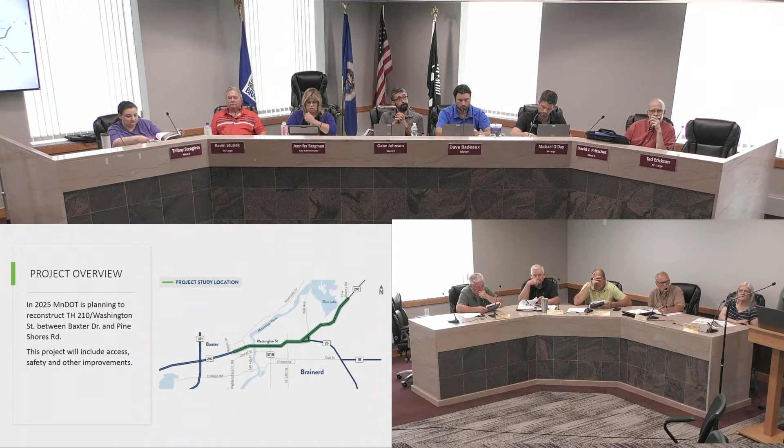So our study of this project is essentially to learn about this project from all aspects of it—businesses, truckers, commuters, pedestrians, bicyclists. We want to learn how people are using this, how people aren't using this, what are the problems, what are the issues, how can we solve that?

We have some solutions we'll be presenting later, Chris, with SEH, but that's just the first step of many to get there. This is what the study is to do—to get everybody at the table talking. As we go through the presentation, feel free to stop us, and if you have a question, just let us know. We want to hear from people.

So here's the schedule we're looking at for this project. 2020 was a big chunk of analyzing the information, collecting the data, and although it's not shown here, in the winter of 2020 we went out with online engagement. It's a MetroQuest tool that people can use online, taking a quick 15-minute survey, marking areas of interest and writing comments on everything. We did that in the winter of 2020.

This spring we've been analyzing that data along with the existing traffic data that SEH has been obtaining, putting it all together and trying to develop some solutions and possible things to move forward on this project. The next step is our second engagement process, which will hopefully have more in-person interaction, plus an online open house to gather that feedback too. After gaining that input, we'll go back to the drawing board, get more detailed into the layouts, and draw more specific plans to reach a preferred concept alternative that we'll bring to the City Council for municipal consent. That's the end goal of this study—to have a community-approved, municipal-consent layout that we can move forward with to design and build the project in 2025.

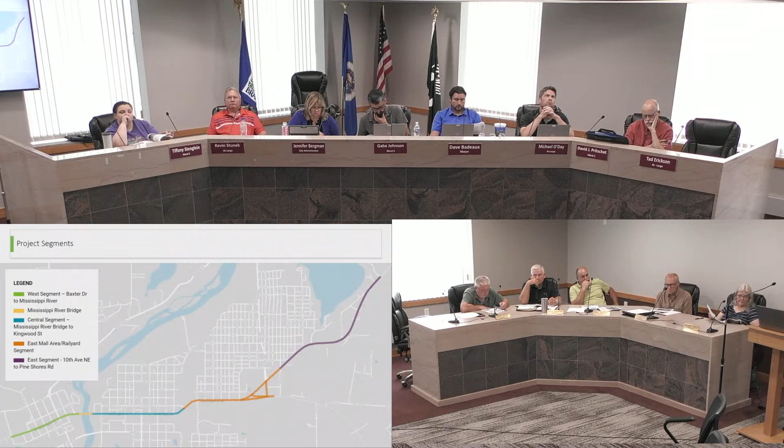Starting out with a little bit of context: it's a complicated corridor. To set up a framework for presenting the information, we divided the corridor into several study segments, built around land use changes and major features along the highway. So as we step through the information, we'll go west to east through the corridor, and this is the way we plan to present it to the public as well.

We're going to start in the west segment. As we go through each segment, you'll see a common flow of graphics—each will start with an image that looks similar. Here we're showing Baxter Drive to the river, our west segment. The existing image shows basically what's out there today in terms of number of traffic lanes, shoulder widths, sidewalks, those types of provisions. Under proposed, that's the idea of how it could be modified to help better address some of the issues we've encountered through public input and our analysis.

In the case of the west segment, it's a little different out here, similar to the far east segment as well—a relatively newer segment of roadway, with right-of-way a little wider and more flexibility. So what we're focusing on here is trying to widen the sidewalks a bit. Today we're on 5-foot sidewalks, and we'd like to get those maybe to 8-foot, which can be done within the existing right-of-way. We'll come back to more of these images later in the presentation.

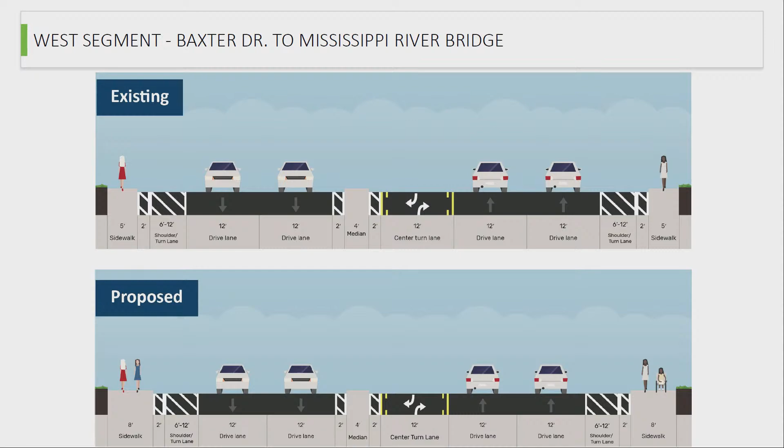Within the west segment, the focus problem area is at Northwest 4th. Some significant improvements have occurred here recently, but a couple more ideas to further enhance it. Number one would be the south approach as you're coming up to 210—to go left, we're suggesting adding a second left turn lane, mirroring what's going on across the road heading south on Northwest 4th. That could allow an overall better flow of traffic through the intersection and improve operations.

Secondly, where both the number twos are shown, we're proposing to extend the raised median through those intersections. That's primarily in response to the frequent occurrence of traffic waiting at the signal, backing up more than a block, and either blocking those intersections or making it difficult for traffic on 210 to take a left off to the side street.

I was mentioning to Luke, I got up here a little bit earlier today and had some time to drive the corridor. I was heading westbound just before 3rd, and that's what was happening—I left a break and a car took a left in front of me, and there was a car coming on the shoulder trying to avoid traffic to take a right turn. It wasn't that close of a call, but it illustrates some of the complexities of this area. With all the traffic, it's just difficult to store all the cars the way it's laid out today.

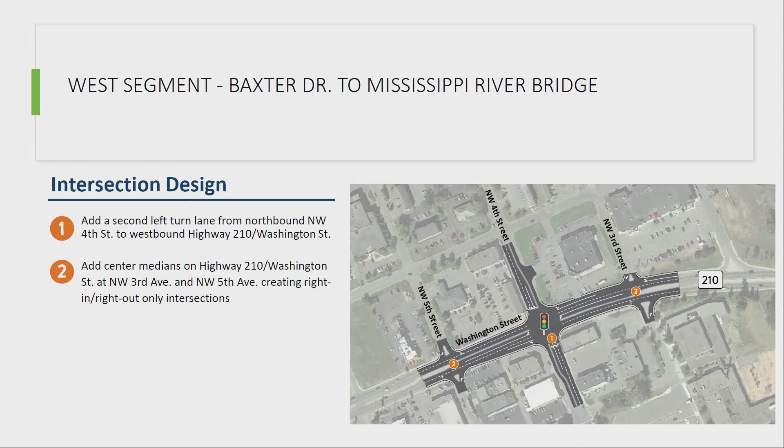Anybody else? Continue, thank you. Okay, now we're at the river bridge, and this is purely just the bridge itself.

Of note, MnDOT's currently studying the bridge in terms of what may need to be done to it over time to rehabilitate it. Our assumption for this study is it's currently a 76-foot wide deck, and that's what we're working with. Our assumption is we are not going to be able to widen the bridge further. So the challenge becomes: what can you do to introduce some improvements, knowing you're stuck with the width of the bridge you've got?

So again, another one of these images that shows existing conditions, and what stands out here is, as you're aware, there's a wide median on the bridge. So our suggestion is to widen the sidewalks by reducing the width of the median. Fairly straightforward. There's a kind of ripple effect of that change that I'll get to a few slides further at the Chippewa Street intersection.

But again, the concept here, and what came through loud and clear in the public input, is this is really a constrictive choke point for pedestrians and bicyclists. You got options east and west of the river, but to cross the river you've got to be on the bridge. So how can we maximize that space working within the limitations of the bridge deck width?

This is just an aerial view of that image. Again, the basic concept here is widen sidewalks, narrow the median. With the goal...

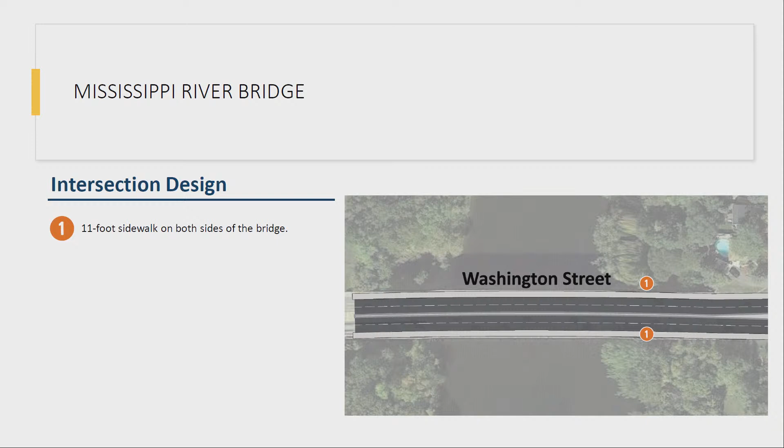So switching those 10 feet, in my mind, what would that do to the speed of traffic going over the bridge, in your professional opinion? In terms of widening the sidewalks, or widening the sidewalks and narrowing the median?

It shouldn't really have much of an effect. We're proposing to keep the lane width the same as it is. You'll have cars a little bit closer to each other now, opposing, so there may be some natural friction, like visual cues to drivers that it feels a little tighter through here, so I'm going to go just a little bit slower. I think you could expect that, though I don't think it's significant. It's a possible side effect that would benefit overall travel speed.

Real quick question - we had this bridge closed due to rain, and it makes a real traffic snarl coming up on Laurel. How long would this be closed? Do you have an idea? Do you have a sense, Luke?

Right now we're doing the study, like Chris said, to figure out what the fix is for the bridge, so we don't know. This whole project, we don't really know the construction aspects of it yet.

Would it be possible to allow one lane of traffic both ways, on one side and then the other? Yeah, that is a possibility. We're looking right now at preliminary plans - it's kind of just going to be a redeck type of thing, so you could do one side of the deck and switch it over to the other side. But that's probably going to be a year or two out before we get to the construction staging of this project.

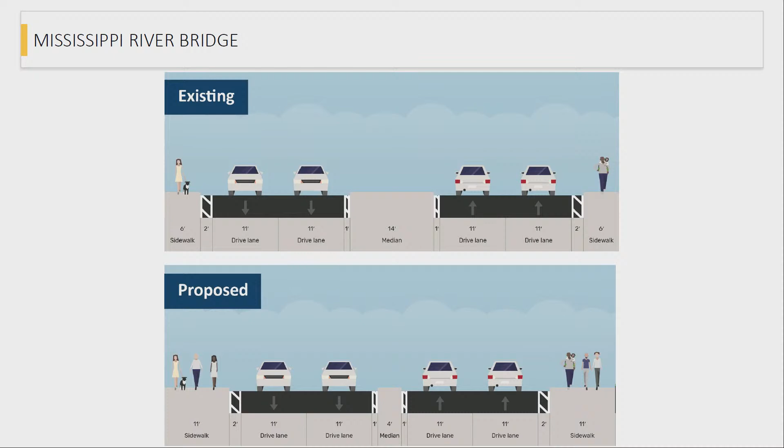So now we move to the central segment. This would be from the river over to Kingwood, kind of the downtown core, the most constricted area, as Luke referenced earlier - 80-foot right-of-way. So if we want to widen something, another element that's out there today needs to be reduced. We've got a fixed dimension we're working within, and we need to figure out what we can do to address what the public's telling us and the safety and operational issues our analysis is showing.

So again, a similar picture here, with a few things going on at the top. Again, the existing condition from 1st to 9th - there's no raised median. Another challenge here is the 4-foot south sidewalk, and that's probably generous - there are locations where it's maybe more like 2 feet. So clearly there's a need, if we can, to widen the sidewalks.

So how do we accomplish that? The proposal we're discussing is the removal of the parking lane on the north side from 1st to 9th - I've got a slide that follows, we'll talk more about the parking. In doing that, we gain 8 feet, and we can put that 8 feet toward the sidewalks. We'll talk more about that in just a minute.

The other piece is that raised median. The benefit of that is managing traffic, trying to limit the ability of folks to take a left from the sideline uses to go across 210 or head in the other direction. Those left turns are particularly dangerous, especially on a road this busy, with 25,000 plus cars a day. So that's the suggestion - there will be a mix of some local streets staying open with the median open, and others, particularly on either side of the traffic signals, where it would be advantageous to carry the median through to limit what's happening at Northwest 4th Street. So this is the general concept being discussed.

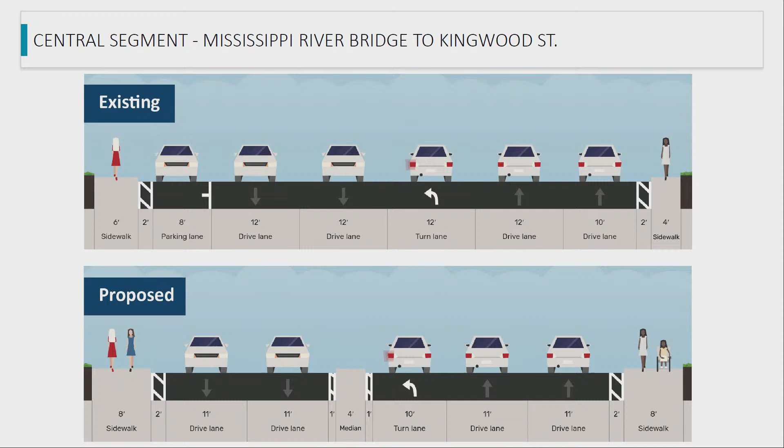Let me get to this parking image and walk you through it. We're talking basically 1st to 9th, and the red indicates where you can't park on the street today, which would continue into the future. The north-south local streets, the grayish color, are locations where on-street parking is provided and would be retained. The black markings on the north side of 210 would be the suggested areas for removing on-street parking.

The other benefit of this - and we realize there are issues associated with it in terms of business access - but it's a real safety issue, referencing the volume of traffic on this road and vehicles parking and opening doors, stepping out into traffic.

It's not a desirable situation. It doesn't mean it can't be, but it would be preferred from a safety standpoint to not have that situation. So our suggestion is what's shown here. There will be more conversation with the public about that and what approaches we can take to provide access to the handful of businesses that don't have any dedicated off-street parking. Folks can go to the side streets and park there, but are there other possible solutions to address those concerns?

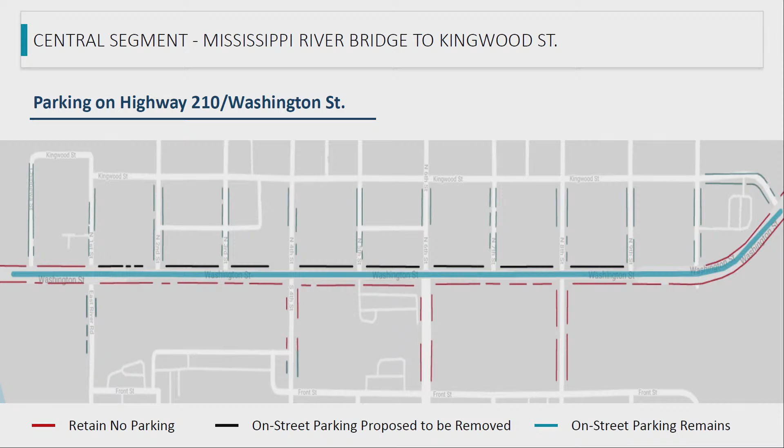Any questions? I've got a question on this slide, more just clarification. You kind of used blue in two different places. Yeah, one as on-street parking remains and one as Washington Street. But your proposal here is not retaining any on-street parking on Washington Street. Correct, in this corridor. So that blue line is a bit misleading. Right, but we're retaining most of what we have on the side streets and not adding any more.

So a couple things. The side streets would be kept as is. The color issue was discussed last week, so we're working on that. When I was looking at this late last week, I noticed those colors are really close, so we'll sort through that so it's crystal clear to the public, without confusion over what that bluish gray means. But yeah, the side streets would be retained as is for on-street parking.

Thank you. Any other questions on the downtown? Yeah, I have a couple on this. One, what does that median do for speeds? Do you have any data on that in terms of putting it in or not? What happens to the drivers? What kind of speed are we looking at?

Similar to the bridge situation, I think in general, if you have something raised up closer to you, even just a curb and a median, that can create a bit more of a friction feel for traffic. I'm not going to say you're going to see significantly altered travel speeds through there, but in general having that little raise will help control the travel speed, as opposed to today where it's just the same level pavement all the way across with a painted stripe to tell you you're not supposed to go over there.

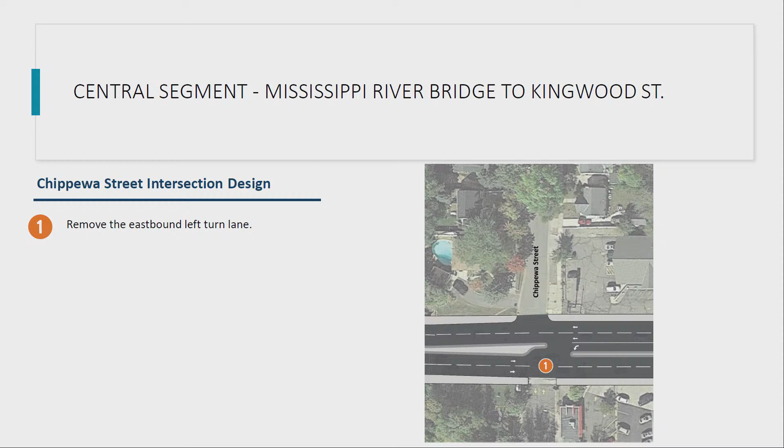One other item, our traffic analysis conducted found there are 3 locations through this segment where the amount of right turning traffic really warrants a serious look at providing separate right turn lanes. The major benefit is pulling that turning traffic out of the through lane, which becomes an impediment and a safety issue when someone wants to take a right turn at the last minute, causing rear end fender benders. The analysis shows this is warranted at East River, 4th, and 8th, similar to what you see at Business 371 today, basically pushing out the sidewalk a little bit to create the right turn lane.

When we get into the details of the design, we'll have to figure out how to accommodate this. We're likely going to have to take some sliver pieces of right-of-way to make this work, so that all needs to be sorted through. At this point, the numbers are warranting this to be looked at, but we don't know exactly how it's going to be accommodated and fit in. East River Road, 4th and 8th both warrant turn lanes, but we definitely need to talk to the property owners and make sure we're not taking down structures or anything like that.

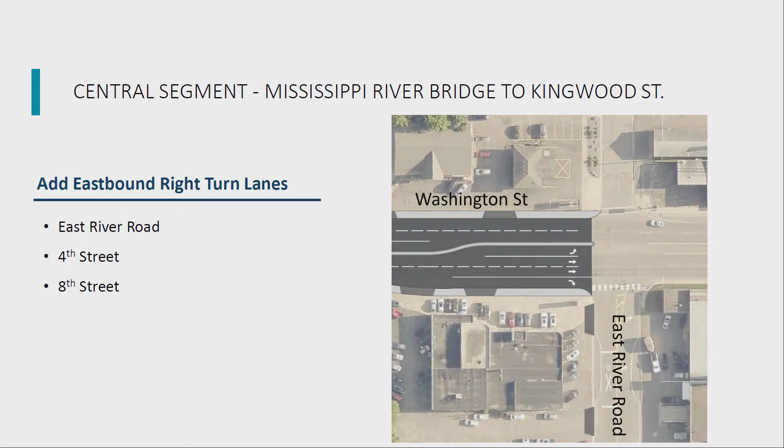Any other questions on turn lanes? Keep going. Good, so now we move to the East Mall area and the rail segments.

This takes us from Kingwood over to 10th, just east of the major intersection at 8th. Again, similar 80-foot right-of-way. The difference here is that along the rail property, rather than the sidewalk, you've got a chain link fence right off the curb. So for similar reasons, what's being proposed is widening this sidewalk a little bit, removing the parking, and increasing the green space on the south side to get some separation from the chain link fence and improve snow storage for the winter time.

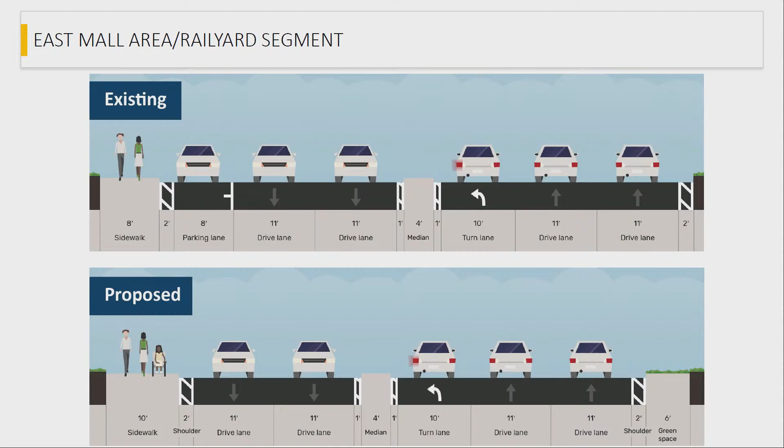Any questions about that? Any questions? Okay.

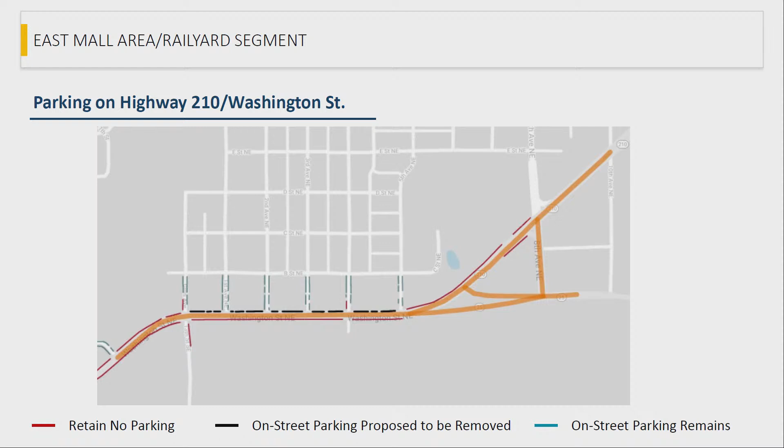Okay, so the next 3 slides are the biggie of the overall operational issues in this corridor. The 8th East Mall area intersection has consumed a lot of our time in looking at options. We're going to share 3 of those with you this evening, and intend to do the same with the public. Then after presenting these 3 images, I have some videos that show an animation of how these different intersections will behave under forecast traffic conditions.

Each video is a couple minutes long. We can skim through them if you want, but I thought it'd be helpful to visualize more than just looking at a 2D map of how these proposals would operate in the real world. So the first concept is retaining the traffic signal, doing some modifications at the intersection itself and the signal type to maximize the flow and capacity. I'm just going to step through each of the numbers here, and some of these will repeat as we look at the other two concepts.

At number 1, the idea is to basically remove the intersection at 25th, where you have to take the hard right turn, and make that a continuous flow up to the north to 210.

Number 2 is the 10th Avenue intersection, with the concept of restricting the ability of people to either drive across 210 or take a left onto 210. You would still be able to, if going east on 210, take a left on 10th. If going west on 210, you could take a left south on 10th. It's that common thread here because we have such high traffic volumes on these secondary intersections, where we can, we would like to limit how people can turn because of the conflicts it creates.

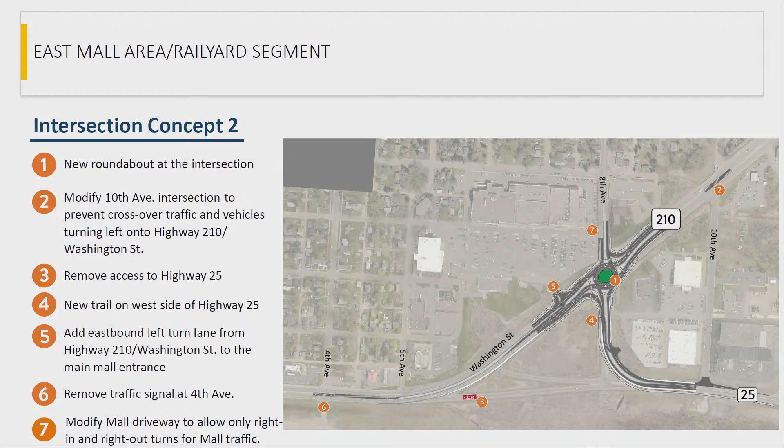And then finally, concept 3 is a roundabout but splitting into basically 2 intersections. If you think about each of these 3 concepts, this one easily accommodates the traffic demand into the future, by far and away operates the best.

Concept 2 would be second best. Concept 1, the traffic signal, would operate the poorest of the 3, but still better than today, adequately in the future, though there would be some turning movements you'll probably pick out on the video we're about to watch, where you start seeing pretty long queues. But it can work, the signal can work.

So again, 2 new roundabouts, the same change at 10th, where number 2 is. Number 3 would be, now you see the kind of new 25 access to this, I'll call it South Roundabout. That stub up to the connection up to the roundabout, on the east roundabout, would be removed, where today it would be a public street. You can keep the rest of that roadway segment if you want, but there would not be the public road access where that number 3 is up to the north, and it wouldn't plug into the roundabout. Number 4 is, again, that east 210 access, left turn access into the mall.

Number 5 is the removal of the eastbound 25. The removal, number 6, of the 4th signal. And again, we don't need the signal at 5th under this one because of that new eastbound access to the mall parking lot. And then similarly, number 7 is that change of access at 8th into the mall.

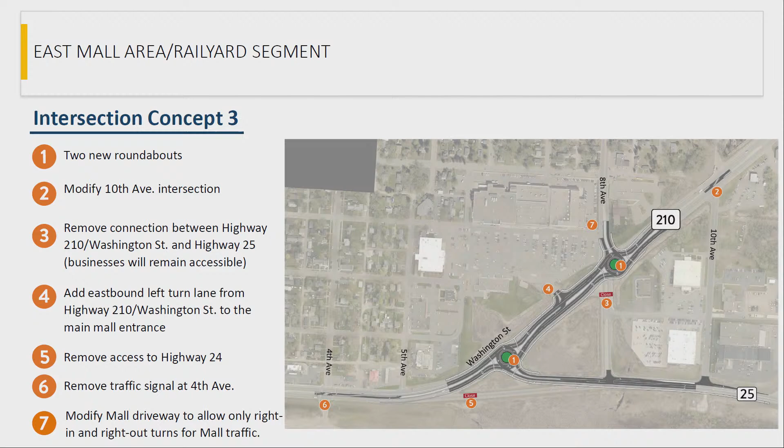I mean, this mega roundabout looks pretty interesting, but it would have a lot of traffic as we're considering connecting the Cuyuna Lakes State Trail segments we already have in Brainerd to what they already have built in Cuyuna range. This is where the trail connection would be. How would this mega roundabout in concept 2 facilitate bikes safely, or pedestrians even?

So the benefit of roundabouts is, if you're walking or biking, you're crossing one direction of traffic at a time. You wouldn't have the control, wouldn't have like a semaphore saying you can go now. Yeah, we don't need a beg button. We just want to make sure people can get across safely.

So that's the major benefit of the roundabout, you're just crossing over, and then you have a refuge island, you can wait, and now you can look the other direction and cross over the next direction of traffic to get all the way across.

On a roundabout that would have that level of traffic in the summer, when we have the summer cross-lake traffic meeting with just the regular 210 traffic, how long would it take an individual on a bike with a 5-year-old son to cross that intersection?

It depends, I can't give you a number, but... Would it be in minutes or seconds? It's going to be, well, it could be either one, really, because if you can imagine, most people, my experience in crossing roundabouts is, as they're designed, traffic is slowing down as they're coming into the roundabout. Some people, maybe not as much as others, but in general, the traffic is slowing.

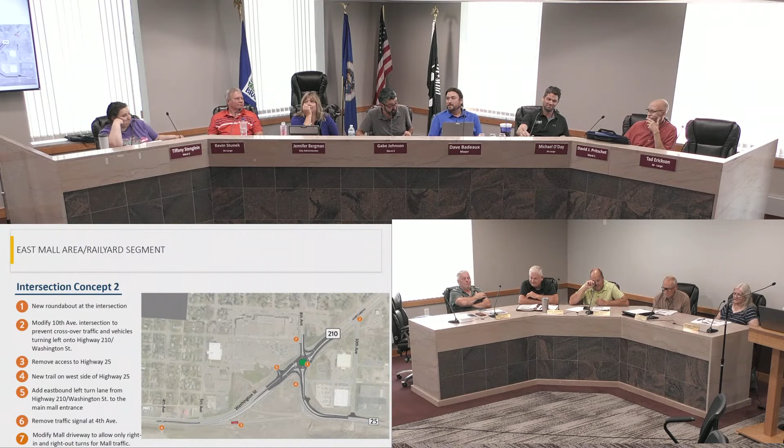Mayor Dave: a follow-up to that - numeral 2 on your three different concepts, I absolutely don't like, as a person who has spent a lot of time in Northeast. I cut across that road all the time, probably twice a day. It's a very convenient place to get across, and it's far enough from the stoplight that there's no impeding traffic in that area. So I'm going to put it on the record that I absolutely hate number 2, as in eliminating the 10th Avenue crossover traffic - bullet point 2 on all three concepts.

Well, it's officially noted. Any other questions on this?

I have a question - CSAH 45 and Mill Avenue, or 13th Street and Mill Avenue, are county roads. I noticed you didn't have any concepts discussed about that intersection at 13th or CSAH 45. What does the data show in terms of traffic, if there's any improvements needed there? That's another signalized intersection. The analysis is showing kind of what you have today - it would be reconstructed, there'd be a new signal put in, but there isn't a driving need to lengthen turn lanes or add turn lanes. So basically what you have today, just rebuilt, will be able to handle the forecasted traffic.

So we wouldn't lengthen the turn lanes on 13th? Not on 13th, but on 210. Yeah, that's a heavy truck route down to the industrial park in Brainerd, and the turn lane does often reach capacity there. I'm hopeful for longer turn lanes.

Thank you, keep going. So now I'm going to do my best to flip over to some videos here.

I'll start with the no-build scenario. It's just a continuous scroll showing future traffic levels as is. You'll note some locations with vehicles that look like they're not moving - this is actually a Bing aerial image, so those are cars that are actually in the picture. Occasionally you'll see cars driving over the top of cars, but by and large all the traffic here is modeled traffic. The longer you look, the more you see left-turning traffic and queues backing up. A big problem becomes traffic queuing out of the turn lane, so you get left-turning vehicles in the through traffic lanes, which is not a safe situation and creates havoc.

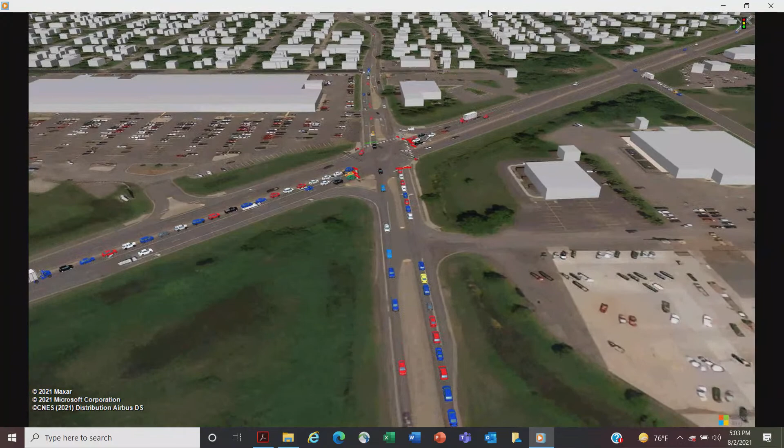So it's a good representation. And again, if you look closely enough, you can see, if you look at the eastbound left turn lane onto Mill there, how far back that's built up. That's really going to result in the traffic signal, the overall operations breaking down.

Hey Chris, this is forecasted, correct? Forecasted, right, this is future traffic levels, yep. What year? 2045. What month and what day of the week? And it actually is the summer condition. This is a summer projection? Yep, that's a good question.

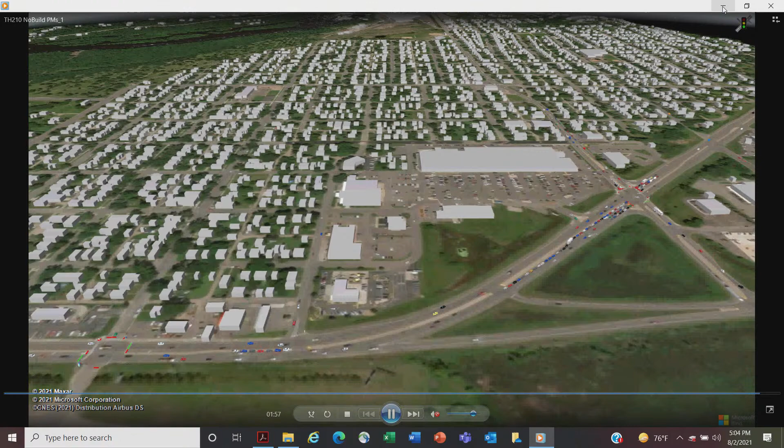So I think maybe I'll jump to alternative 1. This one's just about done. So this is the traffic signal, and you're going to see the picture of the new configuration. This mimics what you saw earlier on the drawing I previously presented, it just has a different color scheme.

You'll notice there's quite a bit of traffic east 210 to south 25, because that leg, that kind of ramp today, or that direct connection, goes away in this configuration.

You can see the mythical cars kind of driving off into the parking lot here, they're all going across Lake. But again, you'll notice there still gets to be buildup in the turn lanes. You can't remove that, but you can reduce it to a point where the intersection doesn't start breaking down.

So can you back that up a little bit? And I'm still curious, I think I question, are you going to put in a frontage road right here? Because I don't think you own all this here, do you? So how are they going to get from here down to here? Is your right-of-way marked by the green line? Yes. Okay, so you would need to acquire some land to build a frontage road if you did.

That's part of the development, as far as how that all ties together if development goes in there. And that came to our access, our development review committee, potential development. And so that's the location we determined to put that. As you notice, some alternatives closer with roundabouts is based on the stacking to that intersection. And there's some conditions tied to that access being there, so it's still in the works, but that's what we're showing on the alternatives if that does go through.

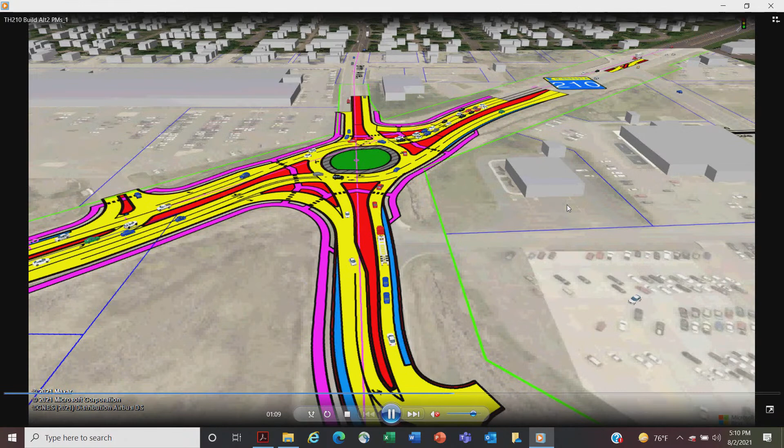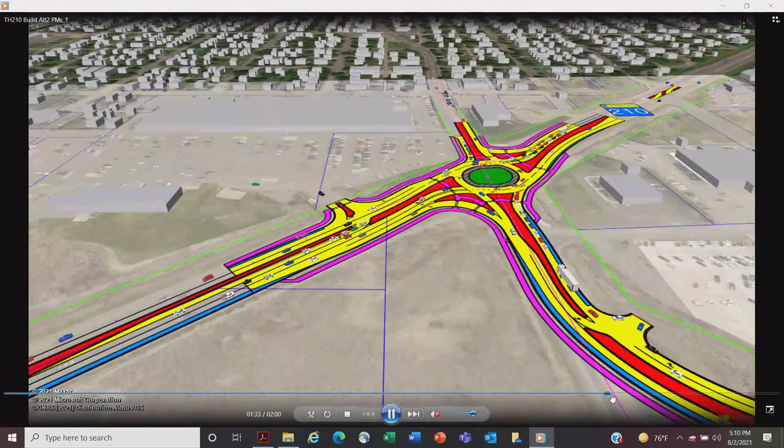This one should, just fast forward a little bit. Yeah, even in the simulation, they can't do a roundabout. It's like... I want to know what 10-year-old kid developed this.

You can see on this one, you've got a left for eastbound to north 4th. Or you do have the 4th left turn, yeah. And then 5th is still expanded longer, so you have less traffic coming out into it, because you don't have a westbound left into the rail yard at that spot, so you're picking up more space to lengthen that turn lane for the signal operation.

And then the final one, again, this is the split, I'll call it split roundabout. Little different angle here, kind of looking northwest.

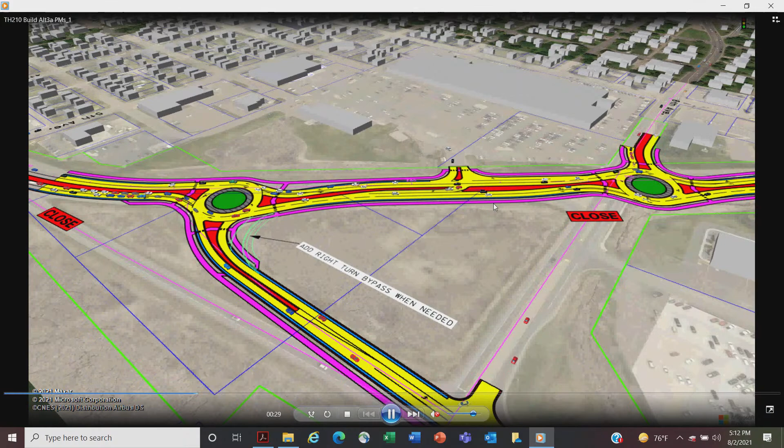So this one looks like it's backing up on Washington Street closer to 5th and 4th and all that. A little bit, right, that's the eastbound traffic. You'll see less of it on the east roundabout, but again there's a backup there, but from a time standpoint it's not a significant issue. It's not going to be continuous free flow, but the relative amount of time any vehicle needs to wait to get through the roundabout isn't, from the basic measure standpoint of traffic operations, a significant problem.

Oh, and then you'd have the space for a right turn bypass lane in the future. What's that red thing right below the top? Here? Oh, the close sign? Is that a closed? Right, so it's indicating there wouldn't be a public street connecting in at that part of the roundabout.

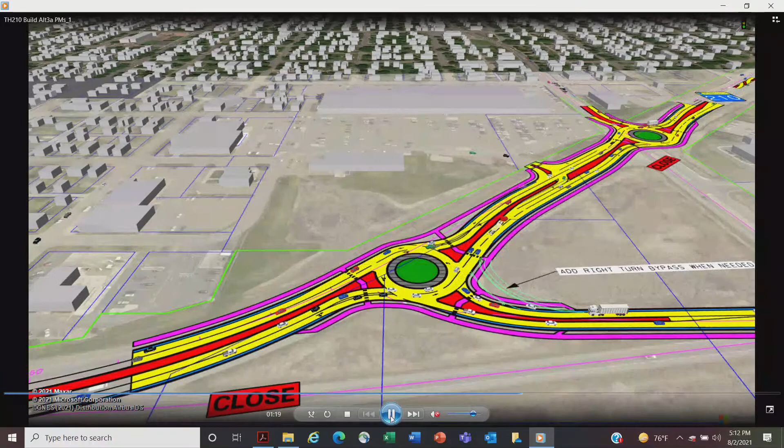So that's what I was talking about, if you were leaving the funeral home, you'd have to go south, down to essentially 25, hit that roundabout and go up to the other roundabout. Correct, to get to it, under this concept, yeah. So when you say there wouldn't be a public street, are you saying there wouldn't be a MnDOT street, or? There wouldn't be an access into the roundabout there. Oh, not into the roundabout. That street would probably be our job then? You could keep it, right? Yeah, right, yeah, which would solve the funeral home, kind of.

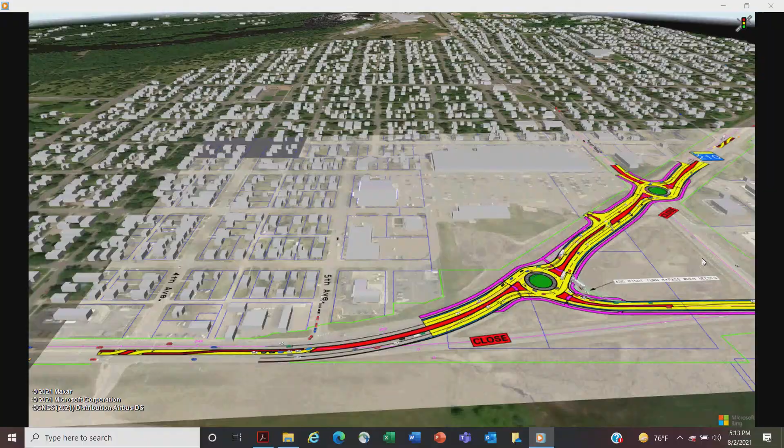So any other comments or questions about this? Wouldn't it be minimally added traffic if you kept that as a service drive for that development, where it says close? It wouldn't be a lot of traffic.

I mean, it's not that we couldn't look at it, but I don't think it'd be best practice to have private access into a major roundabout. Operationally it's probably not going to cause things to fall apart, but from a policy approach standpoint, the benefit of this is you're pulling apart a single intersection into two and spreading the traffic out. The fewer legs into a roundabout, the better it flows, because there are fewer directions of travel coming into it.

I get that. I'm just trying to conceptualize a way to come up with a hybrid between options 2 and 3. I like a lot of things about both of them. I think if we keep that a street and they go south to 25, they'd still need to go through both roundabouts to get eastbound, but they'd have clear and easy access.

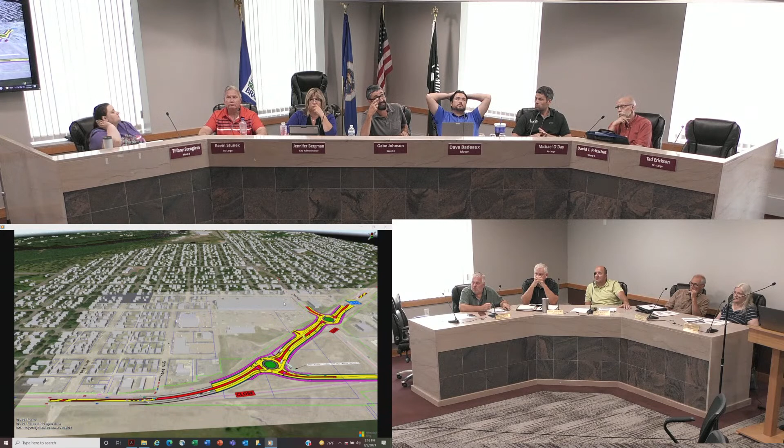Well, but not miles longer either, right. But it'll take a lot of public input, and my opinion is only one, but this is the third best option of the three presented if it's the one that leaves that empty box store empty for another generation. I think if the developers really wanted one of the other options, we should look harder at those.

So I'll go back—just have a couple more slides here. Tad, any questions? Not quite yet. So it's one more slide to show, and then Luke's just going to wrap up with a couple of comments.

So the east segment—this would be picking up at 10th out to Pine Shores—again relatively a newer segment of roadway. The basic concept here is existing and proposed are pretty much the same thing; we're just going to repave the surface, with no proposed alterations to lane dimensions, shoulders, or any changes in access at this point. That's the current thinking.

So I was thinking a little different—maybe we don't need a 20-foot median, and maybe we could have some boulevards separating the sidewalks from the roadway, and a couple of trees, and a welcome to Brainerd, this is a very pretty town sign, something like that—instead of welcome to Brainerd concrete jungle, let's go, right?

Yep, and I think part of the challenge—Luke could speak to this better than I could—is that limiting this just to pavement reclaim and redo is obviously a lot less expensive, and we're trying to figure out how to come up with the best overall package of solutions for the whole corridor within what's going to be undoubtedly a limited budget. As soon as you get into alteration of curbs and medians, it's a different price tag than redoing the surface.

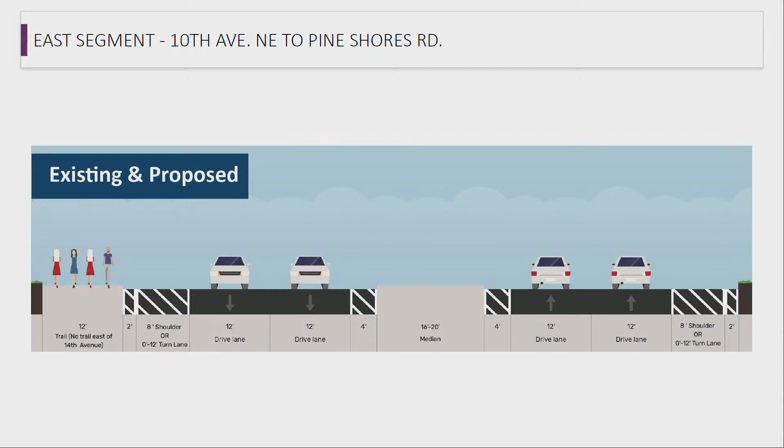The beautiful part about that is the city pays for aesthetics. The city has money for trees. We budget money for trees. No, like Chris said on that segment...

We did the analysis of the materials on that, and we could do a reconstruct, but there's enough life in that roadway that we're just trying to do the fix we can, to get it by for the next cycle, maybe in 15 years, then it might be up for another reconstruct. That would be the time to address all the curb and gutter and all that. So that was kind of the approach on that segment.

Barrett or Dave? Yeah, I just had one question on 13th Avenue Northeast. Have you guys looked at that intersection at all? It's coming right off of Casey's, so there's two intersections off Casey's, 13th and 14th. As far as, I mean, we're blocking off every other left-hand turn or left straight access on 210, but have we looked at that one at all?

So that's kind of the aspect that Chris was saying. We're reconstructing essentially from the Mississippi River Bridge to 10th Avenue Northeast. Essentially, that's where we're addressing all the accesses and everything, and that's where we're spending the money to adjust curb lines and the pavement and all that. So that's where we're looking at it.

And then these, you might call them the end segments, from east of 10th and west of the bridge into Baxter - those are the ones where the pavement's actually in decent condition, and we're trying to do more of a preservation type project and redo the pavement. At that time, when we're actually tearing up the pavement, we look more at access management. We did do some traffic counts at that intersection, just preliminary, to see if there's any problems, and nothing popped up at that time. So that's the approach, the overall scope we're taking on this project at this point.